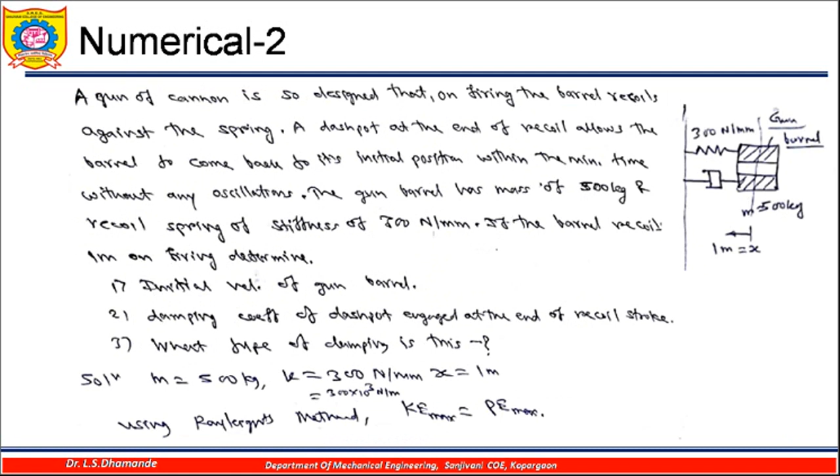So in the previous presentation we have seen two different numericals, and now we will see the third numerical. So in this numerical it is specified that an underdamped shock absorber is to be designed for an automobile. It means definitely it will be having this kind of fluctuations since it is underdamped.

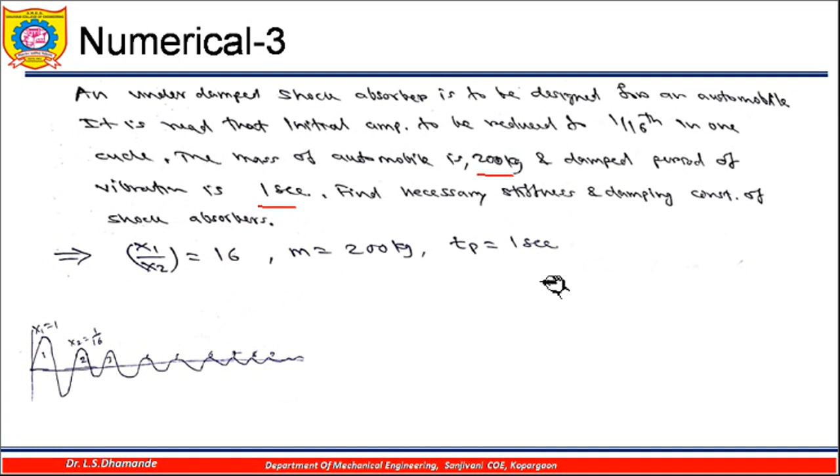Now let us see the decrement which is required here, x1 by x2 is 16. So we call it the logarithmic decrement, which is given by delta is equal to 1 by n log to the base e of x0 by xn, where in this expression n is nothing but the number of cycles.

So as in this given problem the number of cycles is only 1, delta will be equal to 1 by 1 log to the base e of 16, since the x1 by x2 ratio is 16. So we will get delta is equal to 2.7725. Also we know that this delta is given by 2 pi zeta upon under root 1 minus zeta square. Therefore using this expression, there is only one term, that is zeta, which is unknown. So this zeta can be determined.

Okay, and this zeta is equal to 0.4037, that is nothing but the damping factor. So also we know that the time period is given by 2 pi by omega d, and therefore omega d into time period will be equal to 2 pi, and that is equal to under root of 1 minus zeta square into omega n.

So using this expression, now we will determine the value of omega n, which is equal to 2 pi upon under root 1 minus zeta square, which is equal to 6.86 radian per second. Once we get the omega n, this omega n is equal to under root of k by m, and therefore k is equal to 9423.45 Newton per meter. So this is the way you have got the stiffness by using this particular expression of time period.

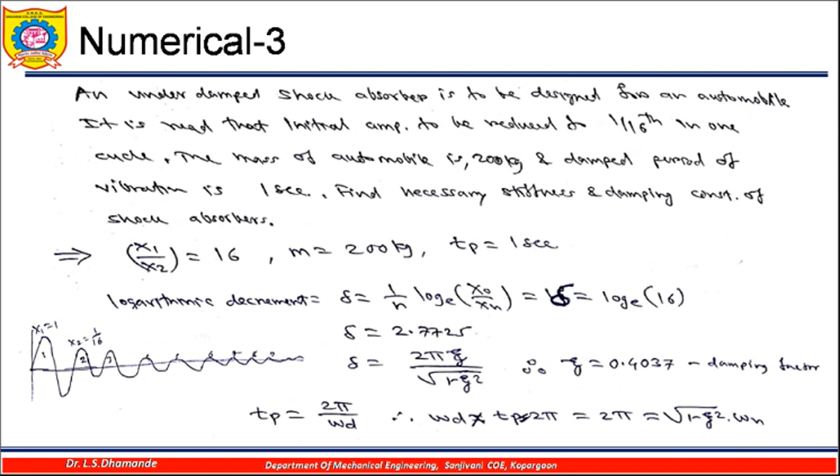And okay, so here you see the time period was given as 2 pi by omega d, and we are putting omega d into Tp equal to 2 pi. Okay, and omega d is nothing but under root of 1 minus zeta square into omega n. So 2 pi upon under root of 1 minus zeta square, that is omega n, and that you have obtained from this expression. Okay, so once you got omega n, you got the value of k also, since mass was known to you. Now we have to find out the damping value c.

So we know that zeta is equal to c by cc. So cc is nothing but equal to 2 m omega n. We are already having this m and omega n with us. So if I put those values, I will get c is equal to zeta into 2 m omega n, and that gives me the value as 1017.75 Newton second per meter. So this is the way you have got the value of the damping coefficient and the stiffness of the shock absorber, which is required to be designed.

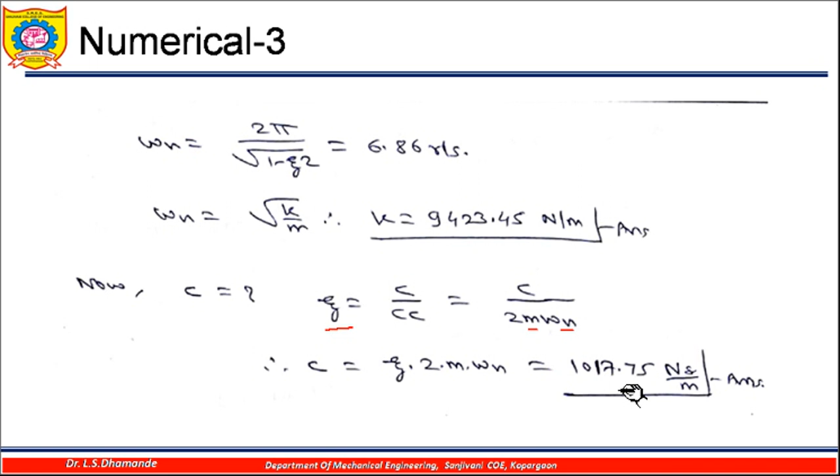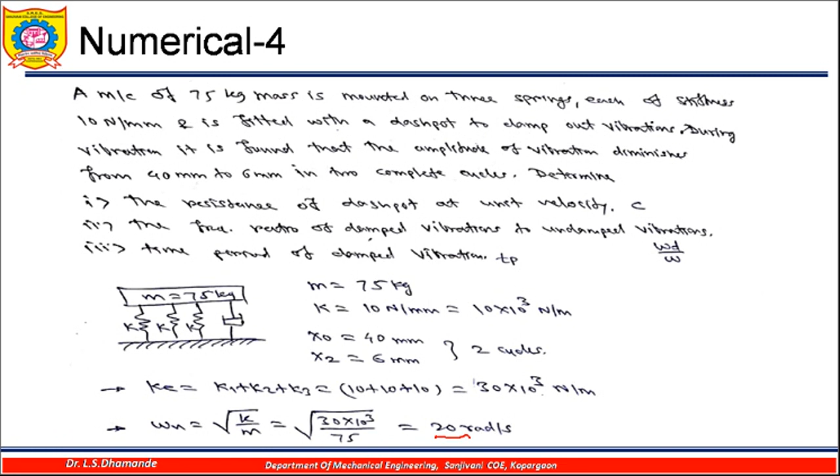Once we get the k equivalent, we can find out the natural frequency of the system. Omega n is equal to under root of k by m, where m is 75 kg. If I put this value of k and m here, I will get omega n as 20 radian per second. Now I will try to find out the logarithmic decrement. Delta is equal to 1 by n log to the base e of x0 by xn. So 1 by 2, since 2 cycles are there, log of 40 by 6. You will get this value as 0.9485.

We also know that delta is given by 2 pi zeta upon under root 1 minus zeta square. Using this expression, I can find out the value of zeta. Another way to calculate zeta is delta upon under root of 4 pi square plus delta square. If I put the value of delta, 0.9485, in the numerator, and in the denominator 4 pi square plus delta square, I will get zeta as 0.1491. Now this value of zeta I will use to find out the value of c.

Since zeta is 0.1492, c by cc is nothing but zeta, and therefore c becomes zeta multiplied by 2 m omega n, which comes out to be 447.80 Newton second per meter. Now the ratio of damped vibration to undamped vibration, omega d by omega n, I have to find out. I know that omega d is given by omega n under root of 1 minus zeta square. I have already got this value of omega d here. So the ratio of omega d by omega n becomes

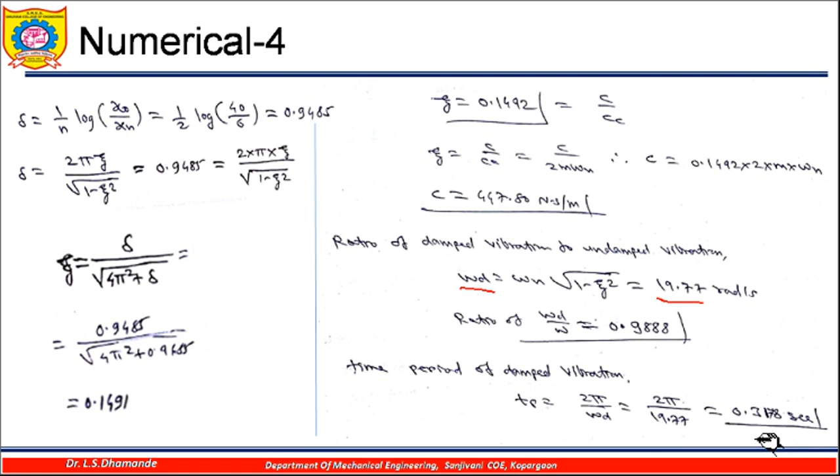0.9888, and the time period of damped vibration, Td, is equal to 2 pi by omega d. So 2 pi by omega d, writing this value of 19.77, I will get this time period as 0.3178 seconds. Also we will see one more numerical.

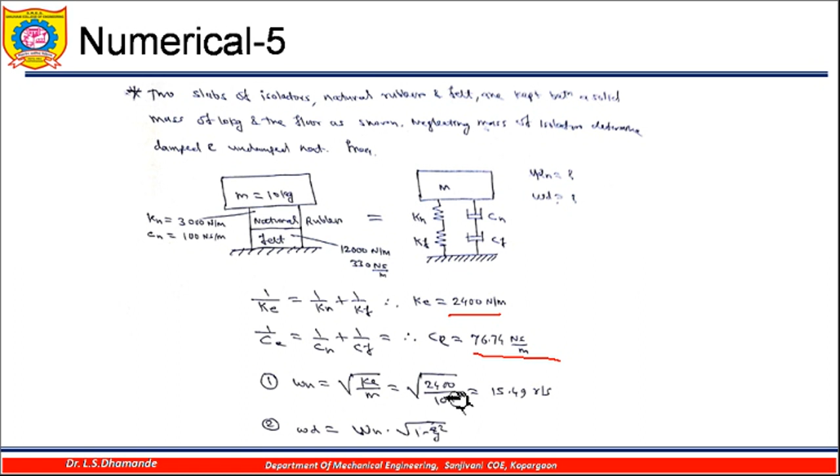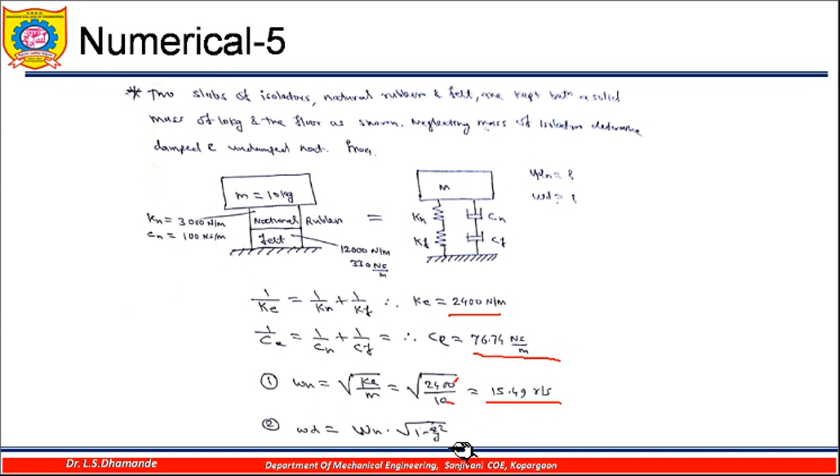Once we get that, we can find the natural frequency, given by under root of ke by m. If I put k as 2400 and m as 10, I get 15.49 radian per second as omega n, and therefore omega d becomes omega n into under root 1 minus zeta square, which is nothing but the damped natural frequency. To find out this omega d, I need the value of zeta. So zeta is equal to c by cc, that is c upon 2m omega n.

So equivalent damping I have written here, and 2 into m into omega n. This value is 0.247. So if I use this value of zeta here, I will get that omega d as 15 radian per second. And in terms of hertz, it will be 1 upon 2 pi into omega d. So 15 upon 2 pi, that will be equal to 2.38 hertz. So this is the way we can get its natural frequency, damped and undamped condition.

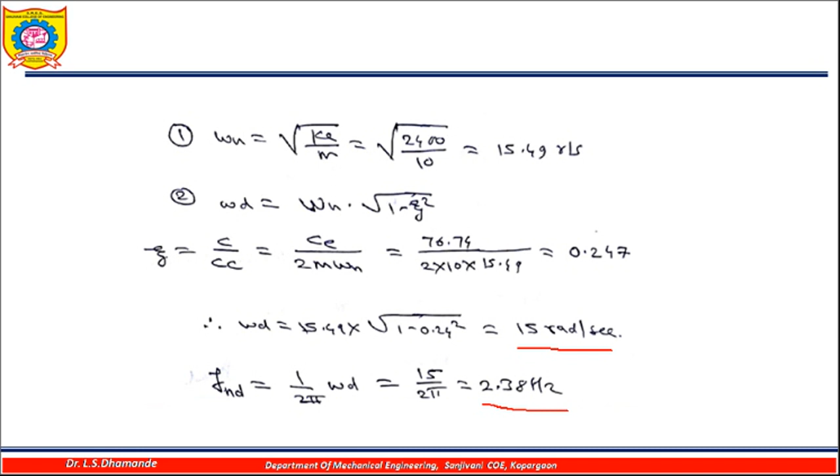Now we will see one more numerical on the torsional pendulum. A disc of a torsional pendulum has a mass moment of inertia of 0.06 kg meter square, that is given to us, and a brass shaft attached to it is of 100 mm diameter, and 400 mm is the length of that particular shaft. It means a shaft is there and a disc is there like this, for having this particular torsional vibration.

So length of this shaft is given, diameter of this shaft is given, and mass moment of inertia of this particular disc is given. When the pendulum is vibrating, observed amplitudes on the same side of the rest position for successive cycles are 9 degree, 6 degree and 4 degree. That means the amplitude of vibration, the theta, goes on decreasing. Initially it is 9 degree, then it becomes 6 degree, and then it becomes 4 degree. Like this is the reduction.

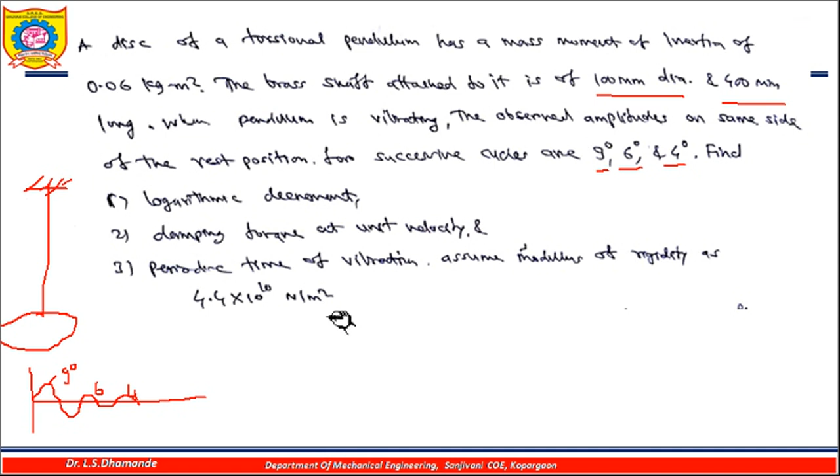And you have to find out the logarithmic decrement. Second, you have to find out the damping torque at unit velocity and periodic time of vibration, assuming modulus of rigidity as 4.4 into 10 raised to 10 Newton per meter square. So let us see how we can do this. At the same time, it has been asked what would be the frequency if the disc is removed from the viscous fluid. So in the undamped condition, what would be the frequency? That is also asked to find out.

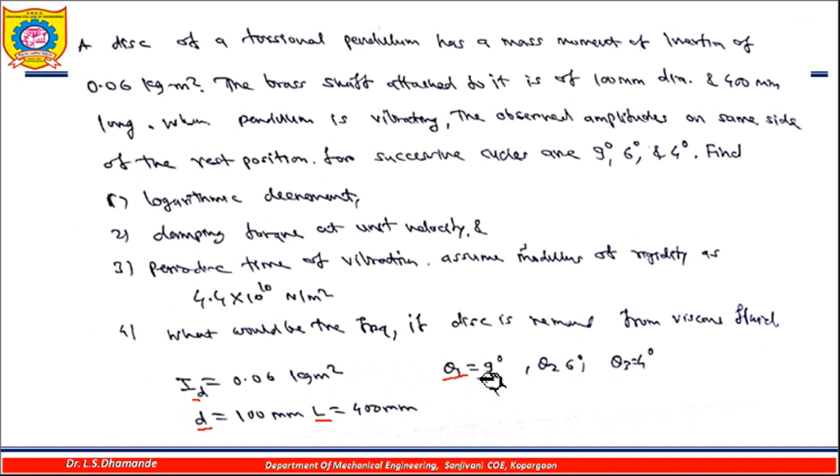So I am specifying for this particular disc I as 0.06, diameter of that shaft and length of that shaft. Theta 1 is 9 degree, theta 2 is 6 degree and theta 3 is 4 degree. You can write it in terms of theta or in terms of x, there is no problem. So x0 by x1 is equal to 9 by 6, that is 3 by 2, and x1 by x2 is equal to 6 by 4, that is equal to 3 by 2. So delta is equal to 1 by n log to the base e of x1 by x2, with 3 by 2 as the ratio for one cycle. So delta is equal to 0.405.

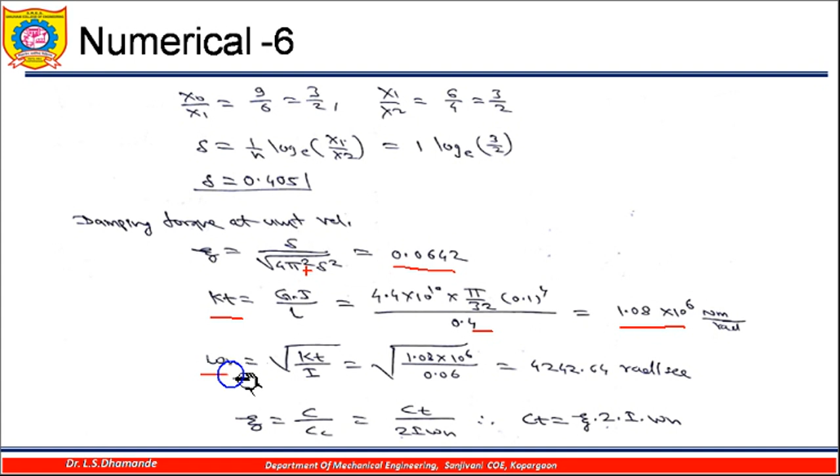Once we get the delta, the logarithmic decrement, we can determine zeta as delta upon under root 4 pi square plus delta square. So you will get the value of zeta equal to 0.0642. Now I have to determine the torsional stiffness Kt, which is G into J by L for that shaft. G is specified, J is pi by 32 d raised to 4, and L is 0.4. So I am getting 1.08 into 10 to 6 Newton meter per radian, and omega n is under root of Kt by I, with I as 0.06. So I get 4242.64 radian per second as omega n.

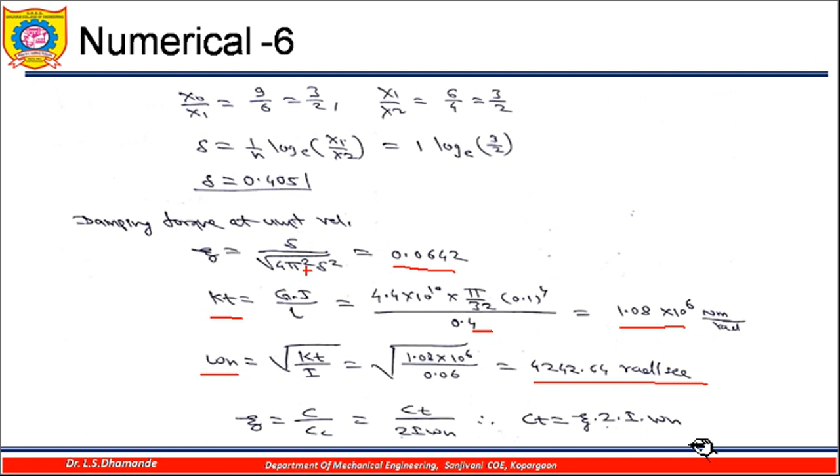And as zeta is c by cc, in this case it is ct upon 2 into I into omega n. So from here I will get ct, which is equal to zeta multiplied by 2 multiplied by I multiplied by omega n. Putting the values, I get ct as 32.73 Newton meter per second per radian.

Now the time period of damped vibration. For that I have to determine omega d first. Omega d is equal to omega n under root 1 minus zeta square, which is equal to 4233.86 radian per second. To get the time period, I write 2 pi by omega d, so I am getting 0.00148 seconds. The frequency if the disc is removed from the viscous fluid will be nothing but omega n, because it is without damping. So Fn is omega n upon 2 pi, which is 675.24 hertz. This is the solution of this particular numerical.